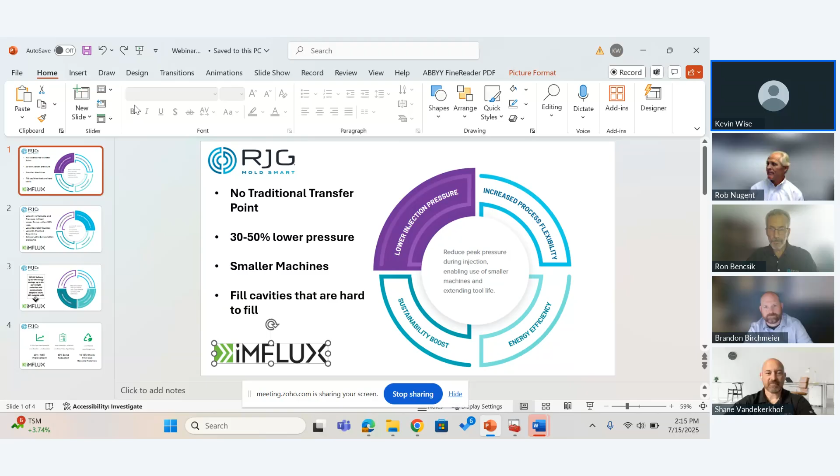Do not see it right now, Ron. Or Kevin, okay, sorry. All right. Let's see. Here it comes, here it comes. There we go. All right. So, is that visible now? Yes, sir.

Looks good. So just a few quick points to set the stage for Brandon's technology discussion.

When you operate with iMFLUX, you're utilizing lower injection pressure, and that injection pressure is also constantly managed. What that really means is you don't have a traditional transfer position. You get to enjoy lower pressures in all of your molding operations. We typically see 30 to 50% lower pressure. That translates into having the availability of using smaller machines and lower capital.

A lot of times the first conversation we have with customers that have existing processes they're having difficulty with is they're having a difficult time filling cavities with the tonnage of the machine they have, or with the mold design that they have. Often iMFLUX can step in early on and help solve that problem. So underneath the lower injection pressure, those are some of the bullet points I want you to think about as you're listening to Brandon discuss how the technology works.

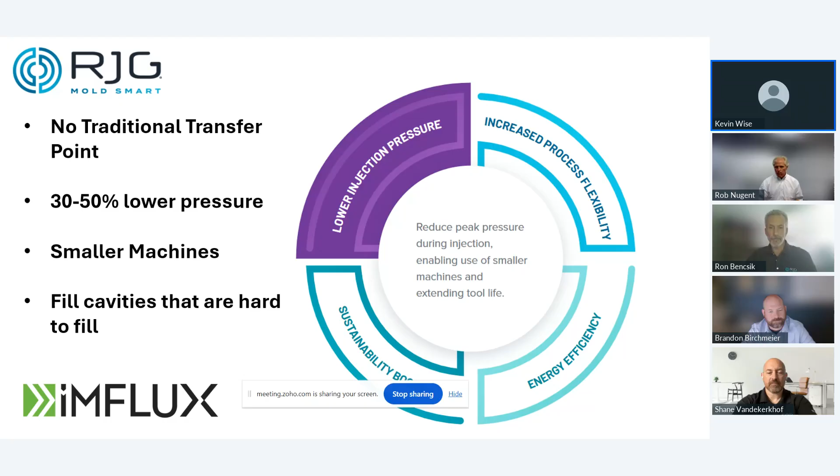The other thing that offers, once you have that lower constant pressure, is increased process flexibility. Brandon will talk about how in an injection process with iMFLUX, velocity is variable and pressure is fixed. And that opens up a lot of opportunities for creating value.

It often leads to much lower scrap, often 50% lower scrap than we see with a process that has to manage through a complicated transfer position. And you can imagine how defects can occur there, and we'll talk about that a little bit more.

Rob mentioned a difficulty with managing labor. Well, with a constant pressure process, you've got less operator touches. You're not requiring the management of that machine like you are with a conventional process. That leads to less unplanned downtime, and that yields obviously higher OEE or throughput.

And then the other thing with the process flexibility is that we solve lot-to-lot variation problems and any problems that arise when you're trying to process any kind of high variability material. So any kind of recycle demands that your customers are asking for, or your management's asking for, that are causing a lot more downtime and scrap, iMFLUX and this kind of processing can really help address that.

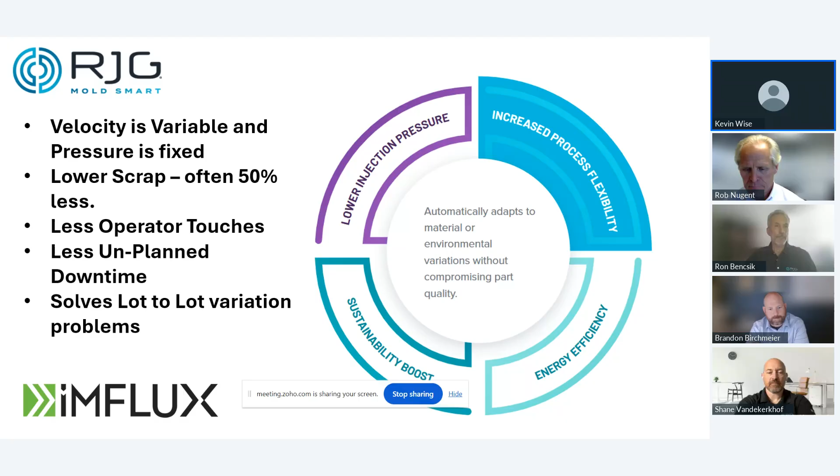Then on the bottom of this framework are a couple of key points too. One is sustainability benefits and energy efficiency. We had Underwriter Laboratories come out and do some certification for us. Through lots of process and testing through that organization, we've got 15% energy savings opportunities, along with lots of part weight reduction opportunities as well.

UL was offering up to 4% part weight reduction, and Brandon will talk about how that's possible with the way our process runs. And then something that's not utilized a lot - if you've seen us at shows, you've seen us demonstrate this - but one of the things that iMFLUX really shines at that isn't fully leveraged yet is managing significant MFI material shifts.

This occurs in recycle streams and in situations where maybe you've got to change suppliers, and you've got maybe the same spec, but for some reason it's just running differently. The iMFLUX process can manage through that without added touches. And then you can see the range that Underwriter Laboratories was able to certify to.

The other part really then is this energy efficiency, and Brandon, I think, will touch on that as well. So if you're looking for the next step - maybe you went from hydraulic to electric machines - you've got another whole range of options available with an iMFLUX process on the energy side as well. So those are some of the key areas.

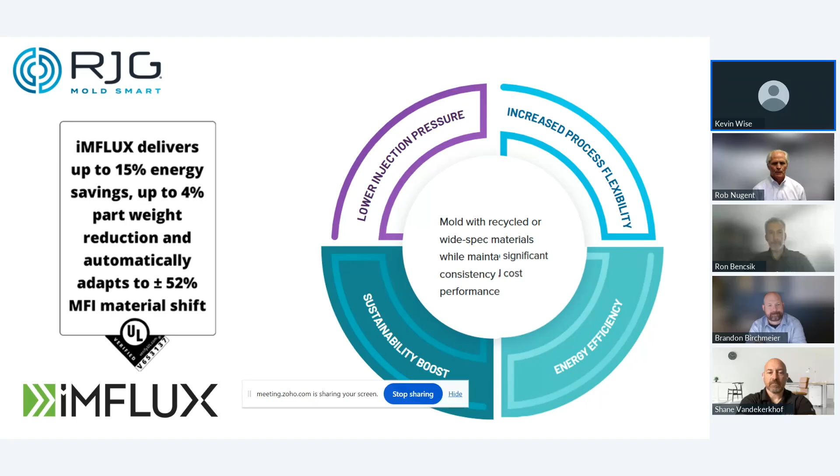And then just kind of to summarize, I bucket them this way when we talk to customers. Between the cycle time reduction and less touches and less downtime, you're really looking at 20% operational efficiency improvements. We see this quite a bit. A lot of people start with wanting cycle time reduction, but see a lot of their benefit with less downtime.

We have customers that report they haven't touched the machine in weeks, whereas we used to have to touch it multiple times a shift. And that's part of that autonomous characteristic that Rob was talking about as well.

We also see a lot of scrap reduction, which is really driven by better quality - less sinks, voids, and other indications like tiger striping, shadowing, and ghosting. With the way we process, which Brandon will talk about, we see almost consistently across the board significant scrap reductions. And then the 10 to 15% energy savings, but also thin walling opportunities and lightweighting opportunities, as well as grabbing those recycle streams that maybe your management is pushing, or your sales guys that are out selling business are bringing to you, that are very difficult to hit today.

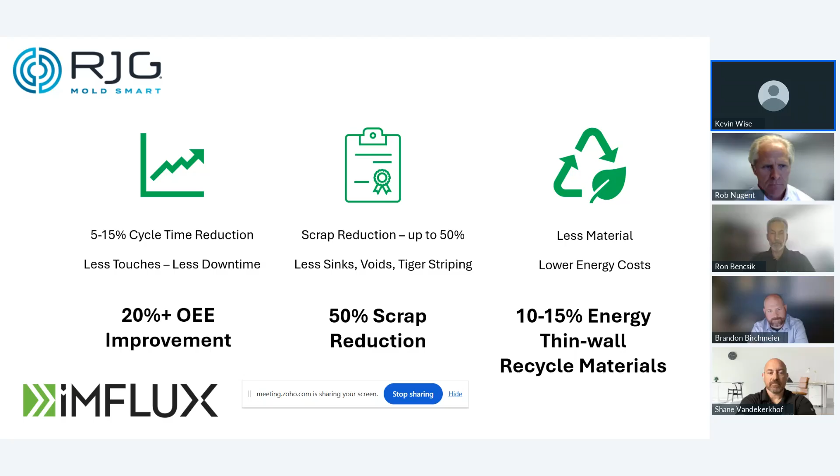So this is just intended to be a quick summary of some of the value opportunities that we think are available. And I wanted to set that stage before handing it off to Brandon so that you could have that context as he's walking through the next step.

So, with that, Brandon, are you ready to roll? I think so, just pop in - should pop up on your screen here shortly. Yep, good. Everyone seeing that now?

All right, okay. First, super excited to be here today. For those of you that know me, not only is it an honor to talk about iMFLUX, but this is super exciting, and I'm elated to be doing this. So this is my favorite thing to talk about. So, what a coincidence.

So we'll dive right in. I'm going to try to do this in 15 minutes, which, again, for those of you who know me, that might be hard to pull off, but I'll do my best. So here we go, let's talk about iMFLUX.

All right, so let's first start off by talking about what the iMFLUX system is, okay? You get three main components to your iMFLUX system. The first is a nozzle pressure sensor, and that's a sensor that gets installed between the end cap of your barrel and the nozzle on the machine. So when I talk about pressure throughout the rest of this presentation, this will be talking about plastic pressure measured right at the nozzle, and that's how that pressure is controlled.

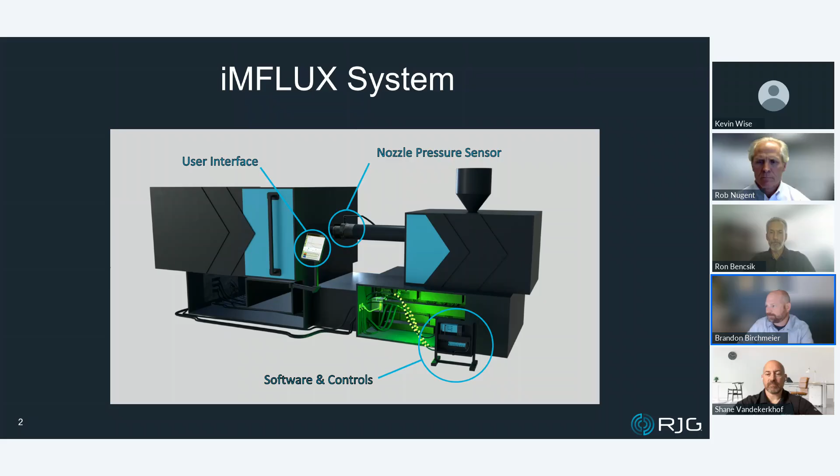So the way iMFLUX works is we bring in some inputs. Those inputs being, like I mentioned, a nozzle pressure sensor that's installed between the end cap of the barrel and the nozzle of the machine, measuring true plastic pressure. We're also bringing information from the machine side, so like hydraulic pressure, if it's a hydraulic machine, obviously, screw position, a run input, knowing when injection happens, right? That's when the iMFLUX system takes over control. And we can also bring in information from a cavity pressure sensor, right? So RJG, being a supplier of such sensors, we can bring that information into the system as well and make that system react to it, and I'll talk about those advantages and how those are utilized in the system.

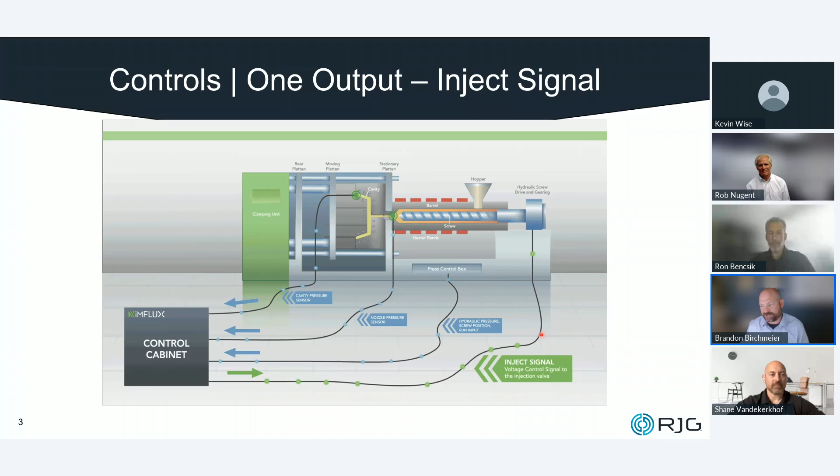So let's first talk about the decoupled molding process, right? The process that is, by far, the industry standard. This is how I was taught to mold. This is how you'll learn how to mold if you go to the initial master molder training classes as well. And what you have is a multi-phase approach, right? You have a velocity controlled fill phase, at 95% full, right? Was how we're taught, right?

You're going to maintain typically a high injection speed, use that rheology, take advantage of that shear thinning of the material, which is typically fast, high velocity. We transfer that 95% into our pressure phase, until we achieve gate seal.

So we have our pack and hold phase. It's a decoupled approach. We have a fill phase and a pack and hold phase. One is velocity controlled and the other is pressure controlled.

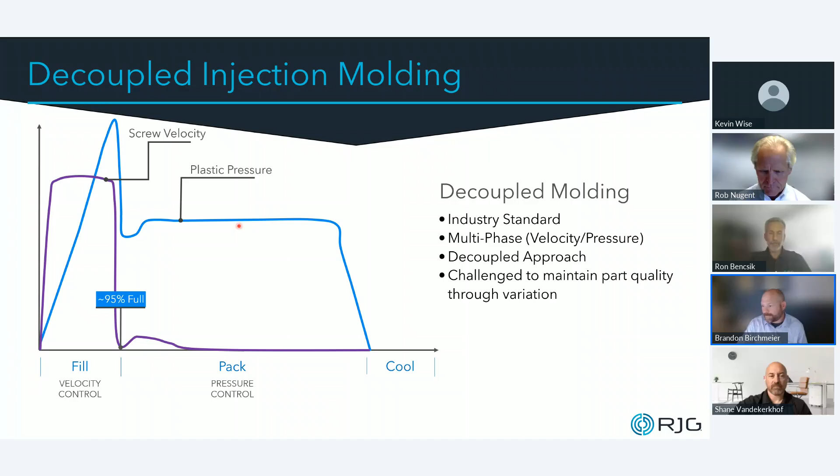So iMFLUX changes this in that there is only one phase, and that's only pressure. At no point in the iMFLUX process do you actually preordain the screw movements. What I mean by that is today your injection molding machine is really good at listening to you as an operator, but it's pretty agnostic to the mold itself.

You tell the screw to inject at 4 inches a second, by golly, that's what it's going to do. It's going to try to inject at 4 inches a second. Those are preordained movements that you as a processor tell your molding machine to achieve through process development and whatnot.

Well, with iMFLUX, where I get excited is the mold is always driving the decision around screw movement, meaning it's always an important part of the equation. The mold is really making all your decisions. What I mean by that is that geometry in that mold and those pressure losses or change in nominal wall thickness, we can account for those in real time because of pressure. Nothing's preordained. This screw movement, this velocity I achieve in this process, becomes natural due to the constant pressure process.

So what happens is as I'm coming up to that pressure set point, we are stepping on the gas. We want to go pretty fast, right? We want to take advantage of the rheology of the material, the shear thinning properties, and we still want to shear that material. Rather than shearing it from start of injection to that transfer point at say 90-95%, that's only happening for a very short portion of the part, about the first 5 or 10% of the part. Are we really shearing that material for high injection speeds?

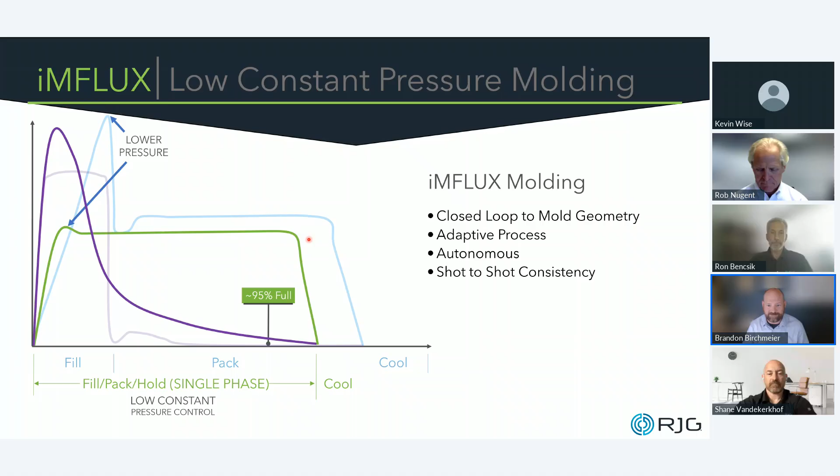So again, much lower pressure process - like Kevin mentioned, we're seeing typically 30 to 50% reduction in peak pressure. This is typically what you're fighting against if you think about your clamp tonnage force. And we do fill the part slower - 95% full on this part is much farther in the process. Overall, this part does take longer to fill than it would traditionally. However, we eliminate this independent pack and hold phase. So if you think about injection forward time - fill, pack, and hold all summarized - the iMFLUX process is actually typically less in injection forward time, even though it takes longer to fill.

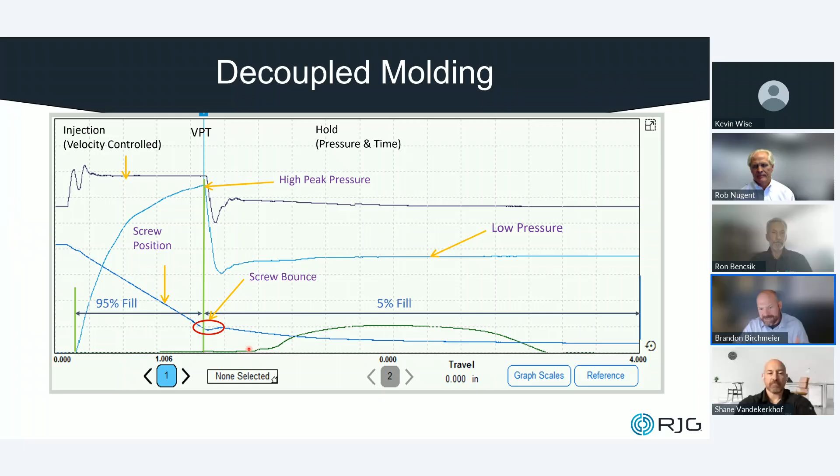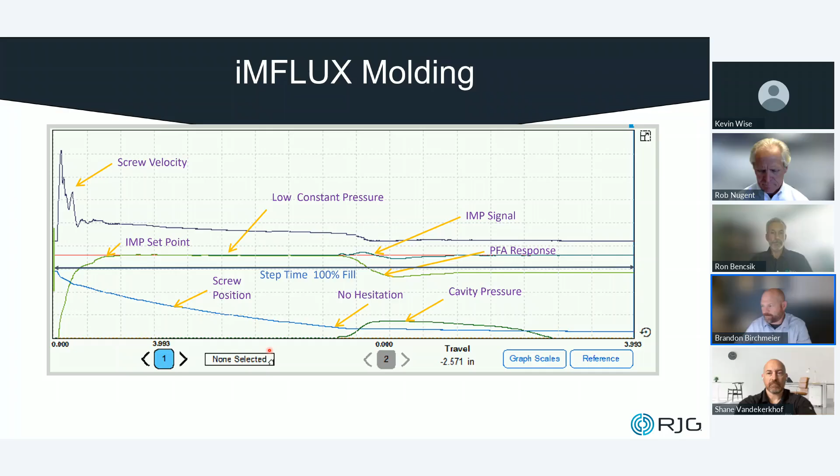So one thing I wanted to elaborate on, especially as we talk about the RJG and iMFLUX partnership - and why I'm, as you can imagine, super excited to be here - is how cavity pressure makes this process so much more alive and actually improves it.

The genius of Rod Groleau and the first cavity pressure sensors, and using that to transfer into pack and hold, was obviously industry changing. What's neat about iMFLUX and how we use cavity pressure is the entire topography of that cavity pressure curve is now influencing the process.

If you've done decoupled molding or decoupled 3 molding, you're using a single point on a curve to dictate transfer. Say I want 1,000 psi at my pressure sensor, and that'll transfer me into my hold phase. Well, iMFLUX uses something called PFA, or pressure factor adjust, which means as we realize cavity pressure, and typically at an end of fill sensor, we will follow that topography.

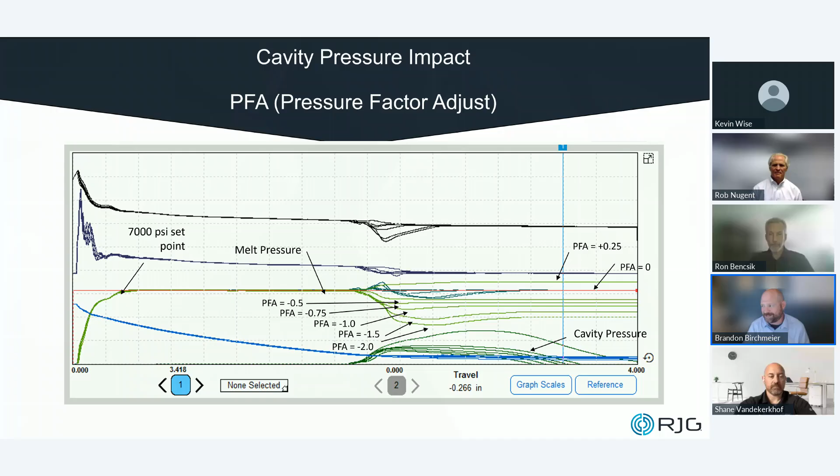Well, if that part packs as it fills, I don't need to go back and fix it. I don't have these defects that I need to fix during the pack and hold phase if I don't let them exist in the first place.

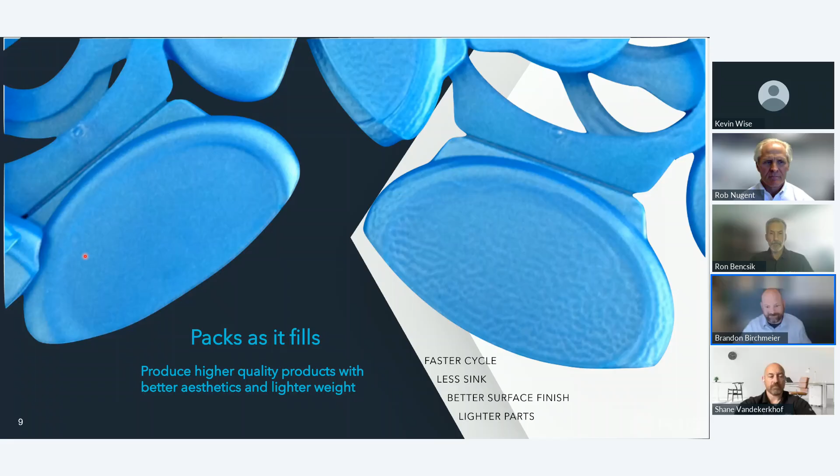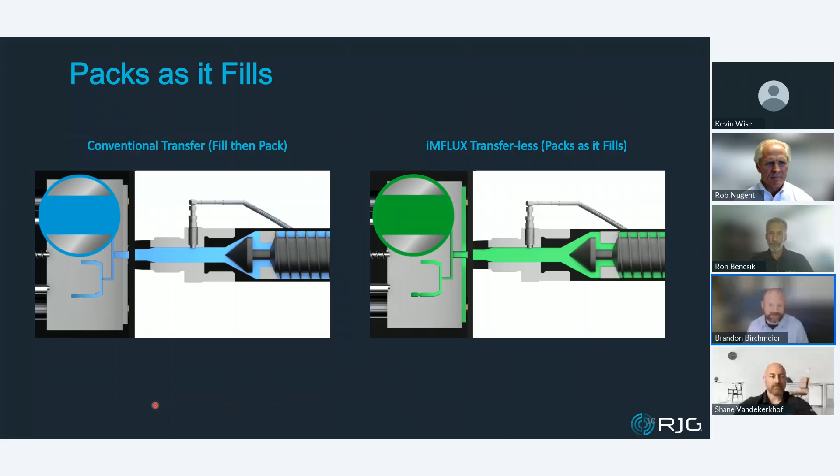We'll play some quick videos here for you. So again, if we compare a traditional high rheology, high speed process, where we want to thin that material, we get this skinning effect of the polymer versus a thicker frozen fraction. What this is trying to highlight is you have that much thicker frozen fraction in the iMFLUX process, much less fountain flow through the center, but also it helps things like gate seal happen very, very quickly if you think about the cross section of your gate during fill and the shear that's generated.

So here we go again, another P&G part. What I want to highlight on this is a living hinge part and an advantage we have because of the significant geometry changes that happen in a part and how we're able to recognize and react to those changes. Like I mentioned before, geometry dictates velocity. I want this shape of this part to dictate what's happening in my machine. And I get that through the constant pressure molding process. And you can see that in this velocity curve. Again, as I try to achieve my set point pressure, I'm going to create some velocity as I do so.

However, as soon as I hit that living hinge section, what happens is that creates resistance in my part. And now I'm going to react to that resistance. It'll slow down, and you see this dip in speed here as it hits that living hinge. As it exits through the hinge and it's easy to fill again, it'll speed back up. This topography of velocity is directly impacted by the geometry of this part.

Your mold is controlling your machine, which is a big deal in our world, because we want to make real-time smart decisions about what's happening in our process. The more the mold influences that process, the better your chances of being successful in those endeavors.

Another important thing is this curvature in your speed - you can't program a molding machine to do that. Traditionally you have step functions: I can go 1 inch a second, 5 inches a second, or 3 inches a second, but I can't control acceleration and deceleration. That's something you get out of the iMFLUX process, the ability to have curvature in velocity, which means much smoother movements of your screw. We're not making erratic changes - everything is very smooth in the iMFLUX process.

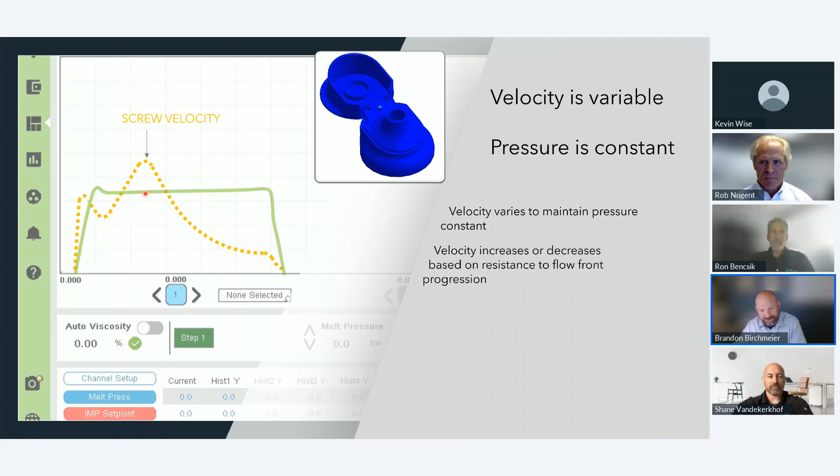The next advantage we get out of the process is something called auto viscosity adjust. If you're familiar with how your material gets tested, your MFI test is a constant pressure process - you put weight in a little vial, and that weight squeezes some plastic out as it's heated up. That's where your melt flow index comes from. It's a constant pressure process. When we mold with constant pressure, we're essentially turning your barrel into a giant rheometer.

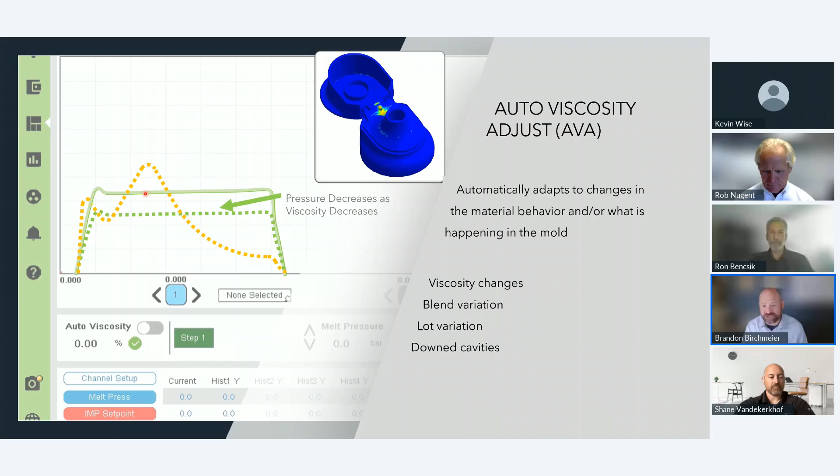What we do is try to understand fill time changes, and we utilize cavity pressure to do just that. So auto viscosity adjust is looking for: do I need to change my driving pressure because my fill time changed? Traditionally, you control fill time by saying inject from shot size to transfer at a given rate, and it's an extremely consistent number - you're determining fill time based on your set points. Well, when you mold with pressure, you don't. Your fill time is kind of an output of that process, but we want to maintain that output.

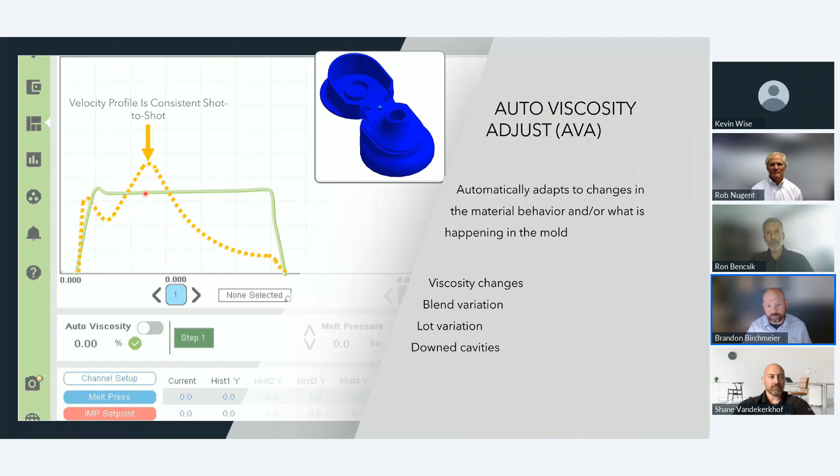So what happens is that pressure profile will increase or decrease to maintain that same fill time. You'll see this in this example here - I'm using cavity pressure feedback, and the process in this example actually reduced itself, trying to maintain that fill time. So if you're running high recycle, post-consumer regrind, we're getting a read on every shot of how easy or hard that mold was to fill, and making an adjustment to your pressure to close that loop. We're always trying to maintain that same fill time, and we do it by controlling pressure up or down.

Kevin mentioned less energy consumption - where does that come from? A lot of it comes from when we reduce peak injection pressure, I can reduce clamp tonnage, so I get those savings. I also get savings from the less injection energy needed because those peak injection pressures aren't being achieved anymore. I've eliminated the pack and hold phase, so the inject forward time, and we're typically reducing some cooling time too.

We'll talk real quickly about how we can improve things like warp. So about 20% less energy in this example. Like Kevin mentioned, we have that from UL at 15% with the testing we did with them.

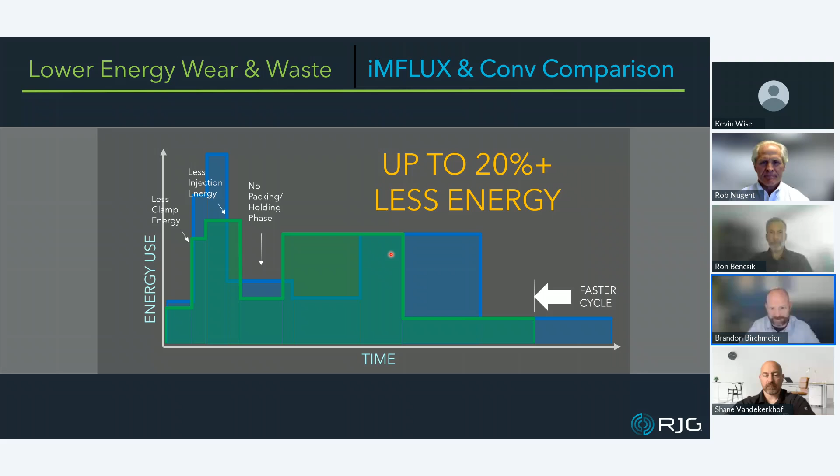So we can do some pretty crazy things with this process as well. If any of you have seen me at a trade show running iMFLUX, you might have seen me making this part right here. This is the mini runner, a part and mold we made on purpose to demonstrate to the nth degree how geometry drives velocity and how this part is controlling your molding machine. In this part, the sprue fills pretty easy until it hits this 30-thou runner system that happens to be 3 inches long that I have in front of me here.

As you can imagine, if I'm molding this and telling my molding machine to inject at 2 inches a second or 3 inches a second, as soon as it sees this transition in geometry, it gets a huge pressure spike and wants to flash. Your molding machine doesn't know any better, right? You'd need to do some pretty wild profiling to probably make this work in a conventional process. This happens automatically when you're molding with pressure - these thick sections fill fast and these thin sections fill slow.

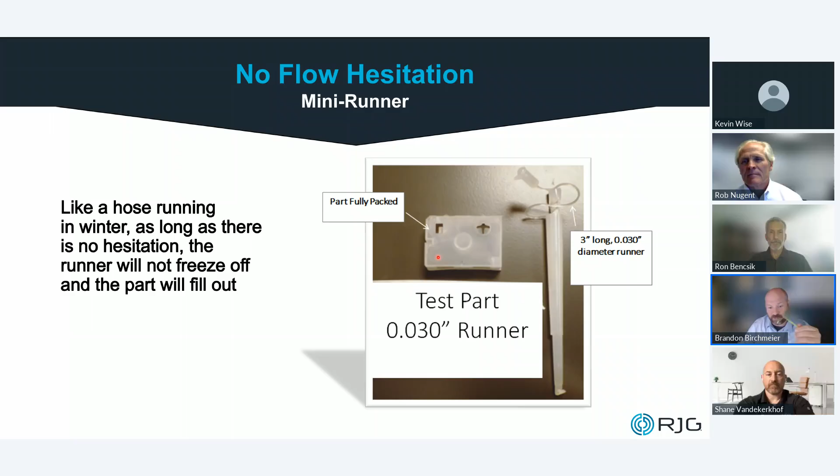As soon as it sees this choke point in the process, it can slow way down as it maintains pressure as it goes through the runner system and then into this subgate, and then actually packs that part out. So as long as it doesn't hesitate, it'll continue to flow. And this geometry, and your wild geometries you may have out there, is really controlling your molding machine in real time with this process.

Talk about reduced stress. A lot of that comes from the elimination of the pack and hold phase, right? So we use pack and hold because we need to compensate for all the pressure loss that we achieved during the fill phase, right? We now need to pack and densify all the internals out of the part. Well, unfortunately, when we do so, we create stress concentrations.

Near our gate locations. So in this part here that's gated at the bottom, this is polycarbonate. During our pack and hold phase, a lot of that is concentrated near those gate locations as we're waiting for that gate to seal, right? It's not like we're really pushing plastic out here. We're localizing all of that pack and hold near those gate locations.

Well, if I'm packing that part out while I'm filling, I don't need to come in after the fact and pack that part out. So those stress locations are much minimized in this scenario. That gate, I don't need to stand on it to achieve gate seal anymore because I'm starting to slow down during my injection molding process. And those pressures are so much less. This part is going to be much less prone to warp. So that's where things like cooling time savings can be achieved as well.

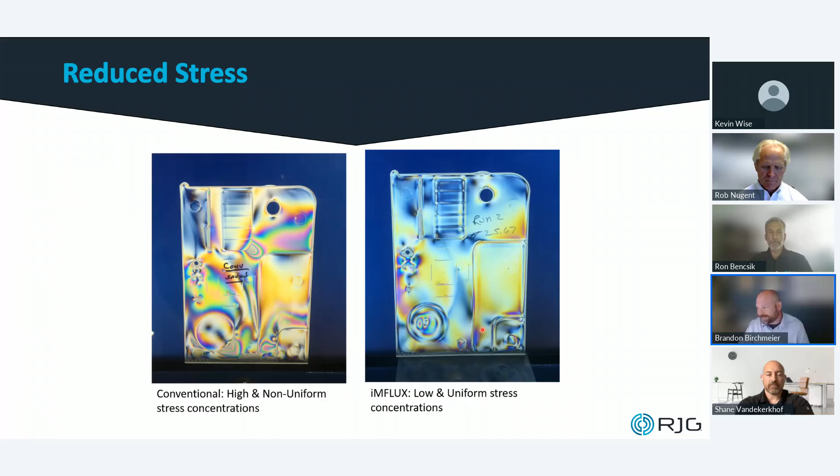Balance of fill, high cavity part, right? As pressure continues to increase in the system, those first cavities to fill see more pressure than the last cavities to fill, right, as that pressure continues to increase in the system. So those first cavities to fill, much higher pressure than the last cavities to fill. That's why balance is so important to our traditional decoupled molding approach, right? Because we know their pressure continues to increase in the system.

Well, when you mold with constant pressure, that requirement isn't nearly as critical. We can live with quite a bit of imbalance and normalize and bring the distribution across multiple cavities much closer together because pressure is maintained constant. That first cavity to fill sees just as much pressure as the last cavity to fill because I am maintaining pressure during the process. So much narrowing of dimensions, part weights across high cavity parts.

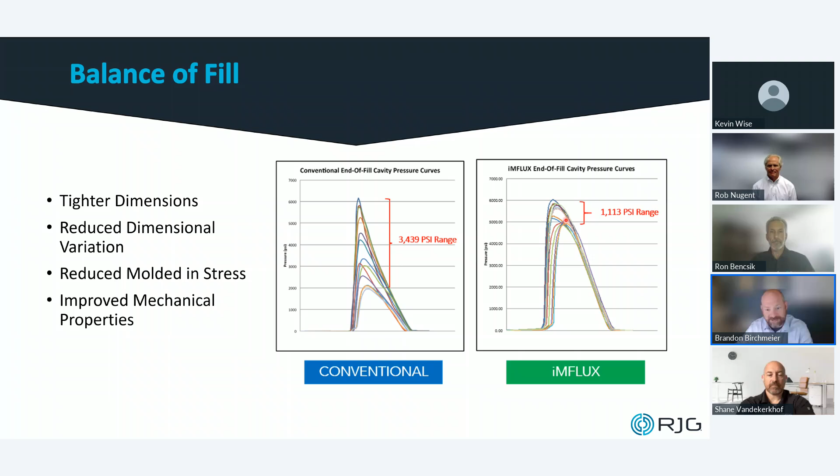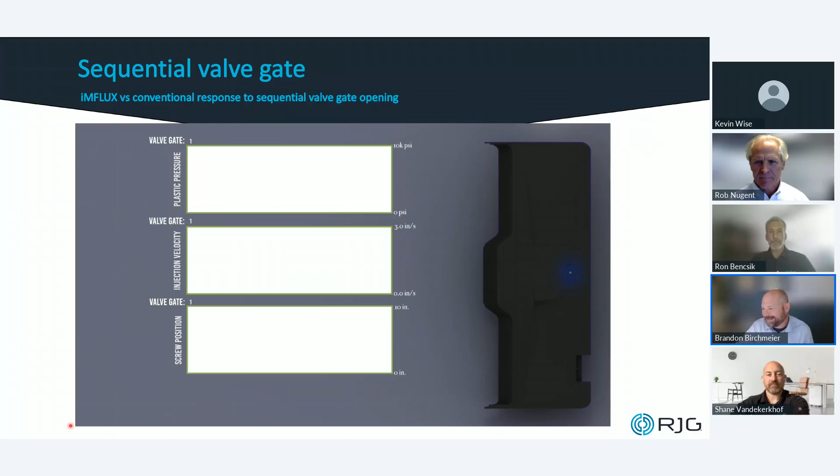The last thing I'll leave you with is sequential valve gate parts. Big automotive parts are near and dear to my heart if you know anything about my history. And one of the neat things about iMFLUX is how it handles sequential valve gates. And what I mean by that is there's now harmony in the process.

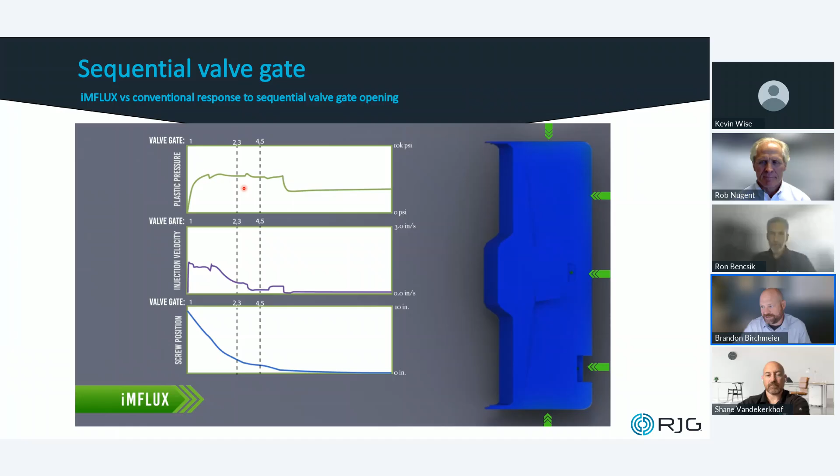So typically as gates are sequenced, so gate 1 here, 2, 3, 4, and 5, I'm maintaining pressure. And I'm getting variation in my fill velocity. It's compensated to changes in gate sequencing in real time. There's harmony between your injection molding machine screw moving forward and those gate sequencing.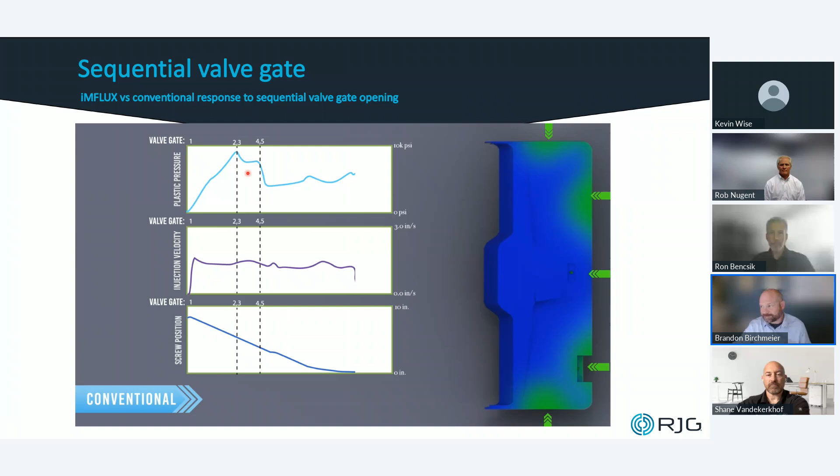Conventionally, your traditional molding, you're telling your screw to inject at a constant rate. And as those gates sequence, you get massive pressure swings in these parts and beat up parting lines, to be completely honest with you. So what's neat is as those gates sequence now, your molding machine is reacting to those sequences, where before it's not. There's two independent systems trying to achieve the same thing, but controlling independently of one another.

So we always want to optimize the process. This is a great way to do that.